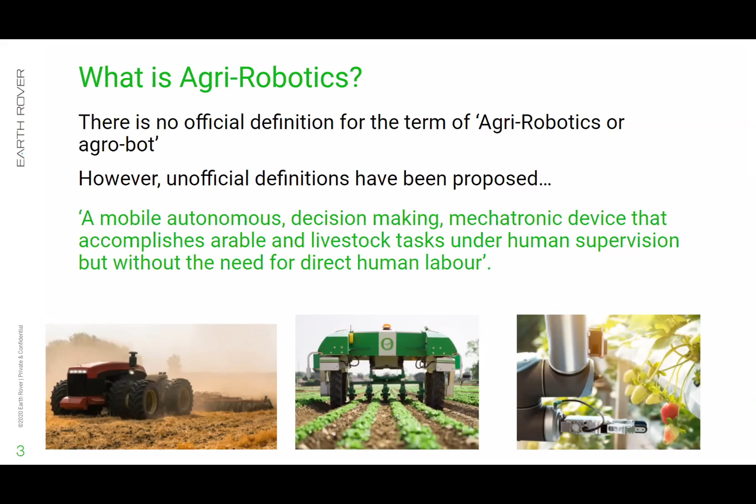So yeah, thank you for sticking around, and I'm going to pass it over to Martin, who's going to talk about the current situation in agriculture.

Waiting for the screen to come up.

In this first part of the presentation, we thought it'd be a very good idea to actually go through what the current situation is in agriculture. Only really, until you actually understand what's actually happening right now in agriculture, can you really start to look at how you can improve agriculture for the future.

So first of all, I'd like to talk about the current situation. Current world population is 7.67 billion people. This is expected to reach 9.8 billion by the year 2050. And currently, certainly in the West, we've actually reached saturation in agricultural food production, the land usage. And this is certainly starting to happen in the third world as well, in the developing world.

And you're now starting to see areas that really shouldn't be used for food production starting to be used, such as the rainforest in South America. So we're actually seeing quite a lot of stress on the land, right? More and more being turned over to farm usage.

But it's not just the world population driving the need for more food. The world is changing a lot. And in the next few slides, I'd like to actually go through the environmental, the ethical, and the economic pressures which are on land usage around the world.

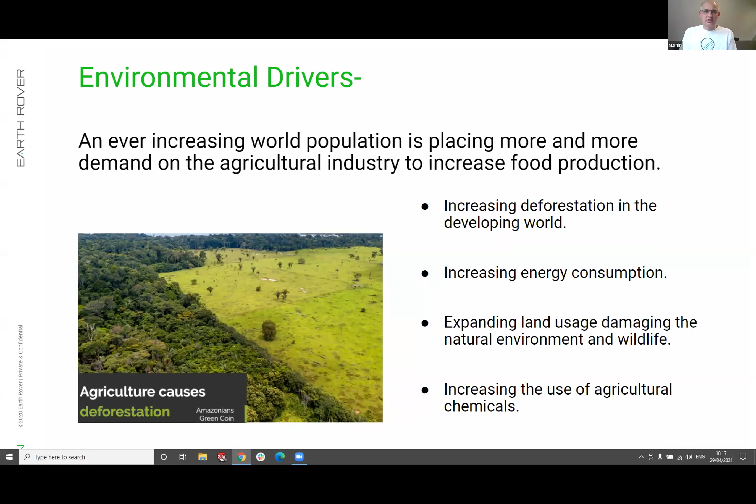So moving on to soil and agrichemicals. The current intensive farming methods degrade the soil quality and break down the soil structure. Continuous ploughing, disturbance, and continually tilling the soil to remove weeds degrades the soil quality. Certainly in the 1930s, we saw the Dust Bowl, and that was caused by poor soil management.

Controlling the levels of fertilizers with the current application methods using large spraying machines is very difficult. We can't easily control the amount of fertilizers and pesticides in the soil, and you see varying degrees of poor nitrate control in the soil.

On top of that, when spraying at large scale, it's very difficult to control the spread of these agrochemicals across the land. And bigger and bigger machinery increases soil compaction. Soil compaction means that when it rains, instead of the chemicals going into the soil, they just drain off, and you see pollution happening into the waterways from soil and agrochemicals rolling off the land.

So again, the current methods in farming do not do the soil that much good. You're seeing breakdown, and that reduces the output of farming land for a whole range of different soils.

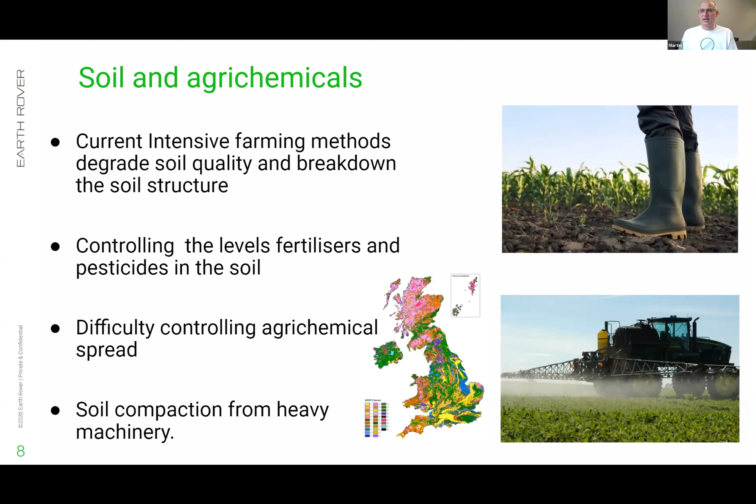So again, this is a large area of concern: water. Agriculture uses 70% of the fresh water used in the world. If you look at all the usage across industry and domestic use, 70% of that fresh water is actually used for producing food.

And this is very damaging to the planet. We use large amounts of water out of waterways, and it's very costly to the production of food. We need greater efficiency in putting water in the right places on the land.

And that's certainly an area that Sam's going to talk about in a minute, about how robotics can help with water usage.

So I'm going to pass on to Sam now, who's going to talk more about how robotics can help solve these problems. Let's stop sharing.

Okay, thank you, Martin.

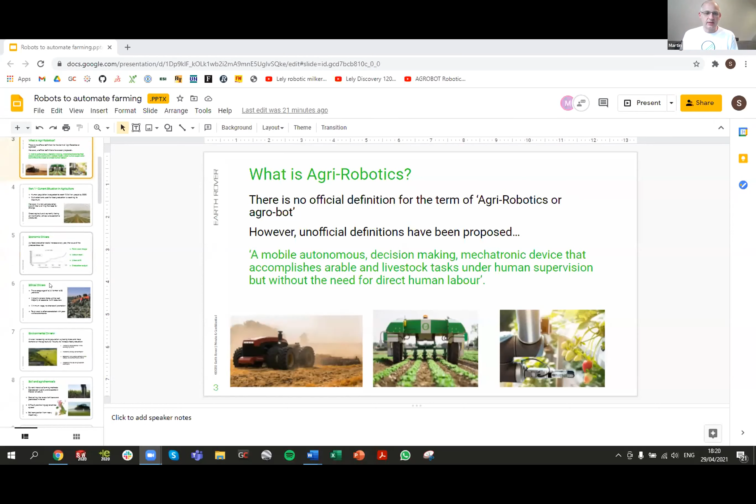So let's look at the current involvement of robotics in agriculture. The first commercially available robots in arable farming cover three main tasks: eliminating weeds, monitoring crop performance, and harvesting specialized crops. In livestock production, robots are currently used for cleaning, animal monitoring, and feeding.

These exciting developments are being made to expand the use of robots in agriculture. So in this section, we're going to go through the current uses of robots, explaining their benefits in the system, and then at the end of the presentation, I'll discuss what the future might look like for agriculture.

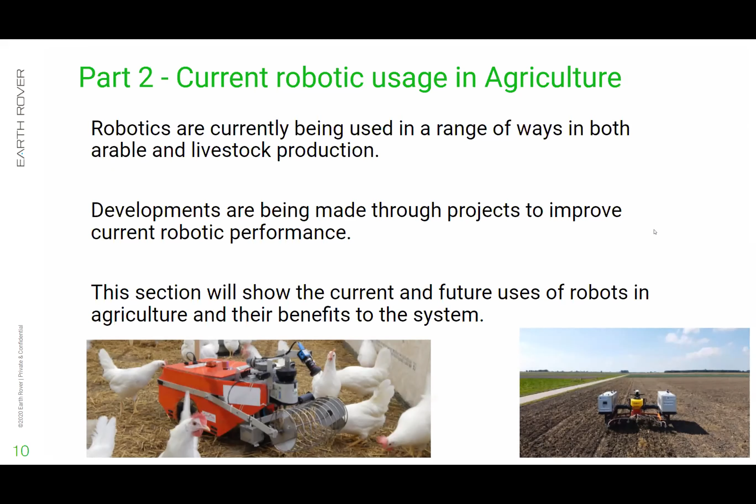So let's start with the first operation normally done in arable farming, which is soil preparation. Cultivation is currently used throughout the globe in both developed and developing countries. The principle of cultivation is to turn the soil into a fine tilth, which provides an ideal environment for seeds to germinate.

Cultivations are typically split into two groups: primary and secondary cultivations. Primary cultivations include ploughing and subsoiling. If you're unaware, subsoiling is a deep cultivation technique where the aim is to target compacted areas under the surface of the soil, typically called hard pans.

Ploughing lifts and inverts the top 8 to 12 inches of the soil, bringing fresh nutrients to the surface and burying the stubble from the previous cropping to decay into valuable organic matter. Secondary cultivations include power harrowing and rolling, which focuses on the top level of the soil profile.

Cultivations are typically slow operations and can often take several days to complete, subject to correct weather conditions. Heavy farm machinery will struggle to operate and produce a suitable environment for seed germination in wet and difficult conditions. For primary cultivations, costly high horsepower equipment is needed to pull subsoilers and plows deep through the soil.

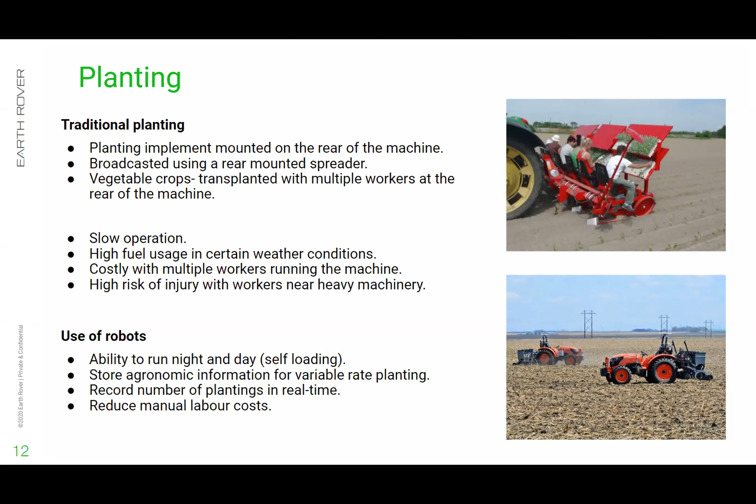Robotic planters would take up the role of 9 to 12 workers in one operation, reducing manual labour costs considerably for the farmer. This next slide shows, I visited an organic broccoli farm in the UK, and...

So moving on, we can look at crop monitoring, and the question is, how do you walk thousands of hectares of crop every week? The answer is it's not possible for humans to walk through this amount of crop and record detailed information. The issue is that you cannot manage what you cannot measure.

The current way of crop monitoring is not sufficient to maintain a high level of crop performance. Farmers need accurate plant-by-plant data for yield and early detection of weeds, pests, and diseases. Without this precise data on plant information, you risk application of costly inputs like pesticides, irrigation, and fertilizer. In addition, without detailed plant information, you may risk inefficiently using costly labour forces for tasks such as weeding and harvesting.

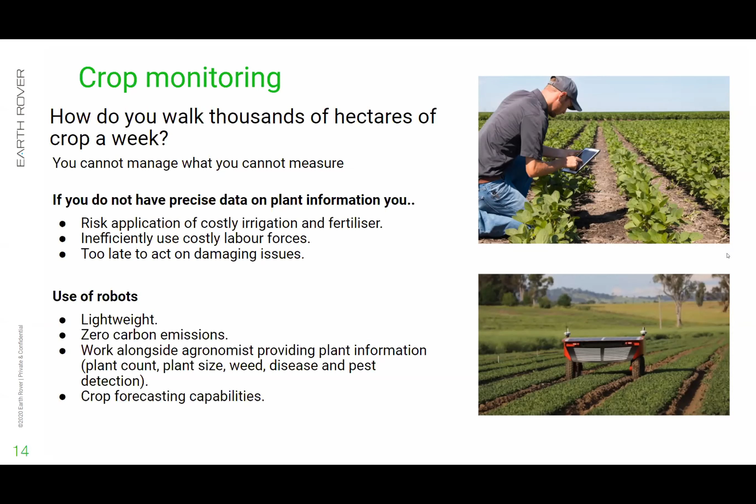One thing you might not know about Earth Rover is that we have our own autonomous scouting robot platform. The Earthrover pointer is a lightweight machine with a total mass of 75 kilograms, so we're really reducing soil compaction to a minimum, maintaining good soil structure, and reducing soil erosion. The pointer is currently being used in the UK on a large organic vegetable farm throughout the growing season, and it's also being used on our test farm in Barcelona.

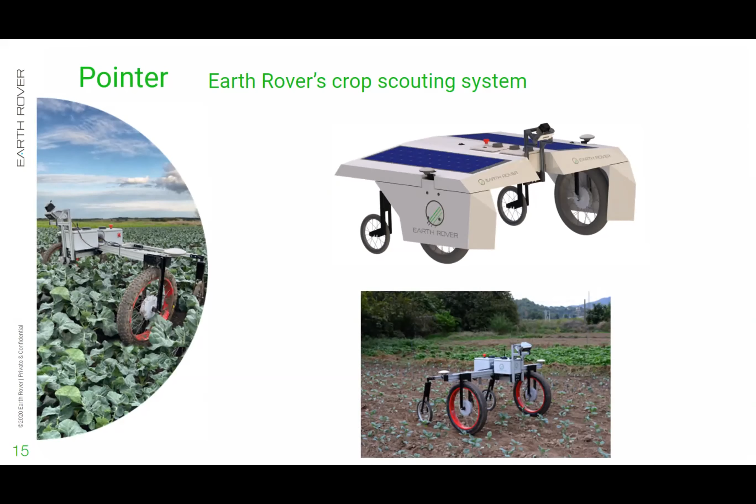The system provides the farmer with accurate data with its onboard RGB depth camera and extensive neural network for detecting, sizing, and mapping plants in real time at a rate of 2,000 plants a minute. With the aid of RTK technology, receiving correction messages through radio and NTRIP, and having our own base station, plants can be mapped to an accuracy of plus or minus 10 millimeters, and robots follow an exact path during each scouting session, minimizing soil disturbance and machinery traffic in the field.

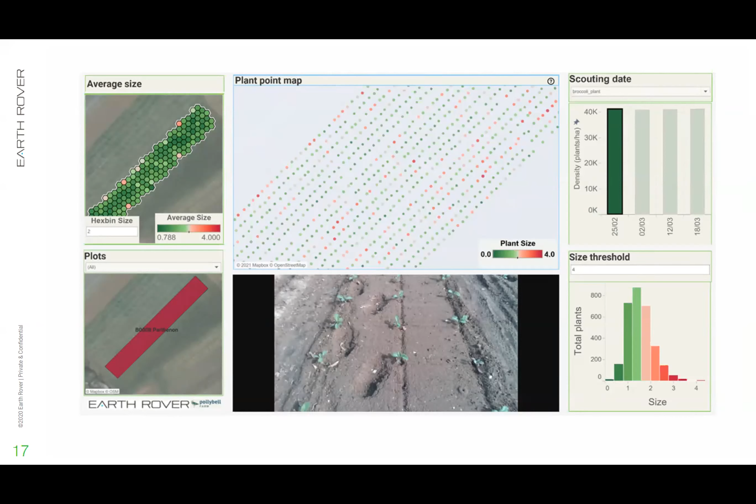As you can see at the bottom here, the ER pointer also generates and stores images at a rate of 1 image per second, and all these images are stored in our data warehouse. So if a farmer is away from the farm and notices an issue with the field from our maps, he can view these images for confirmation and make decisions remotely. Each individual plant on the map has its own ID number, so we can analyze and know each plant throughout its life. With our data, farmers can model and forecast crops like never before.

So from crop monitoring, we can move on to weeding. Weeds can be controlled in several ways, really. This can be through application of agrochemicals, mechanical weeding, flame weeding, or hand weeding, which is typically done on organic farms.

Agrochemicals are applied with expensive spraying machinery. In less developed countries, agrochemicals are still being used. However, farmers are typically not following the correct health and safety guidelines, which can pose risks to the operator. Farm workers can be exposed to harmful chemicals through inhalation, skin absorption, and ingestion, and this significant exposure can lead to long-term health effects, such as an increased risk in some cancers, birth defects, disease of the lungs, liver, and kidneys, and also some nervous system disorders.

Heavy farm machinery increases the level of field traffic and increases soil compaction, which damages soil structure for plant growth and development. Workers need to be trained on how to identify weeds, and if training is inadequate, then workers may damage these high-value crops.

Farmers, particularly in the high-value vegetable industry, spend large amounts of money on manual labour hand weeding. Typical costs for hand weeding are around £400 to £500 per hectare, and if you think about fields that contain tens, if not hundreds, of hectares of crop, these costs can really add up for the farmer. Hand weeding is also a slow process, which is seen as unappealing to many people as it's repetitive and physically demanding. Therefore, limited worker availability is a common problem, not just in the UK, but globally.

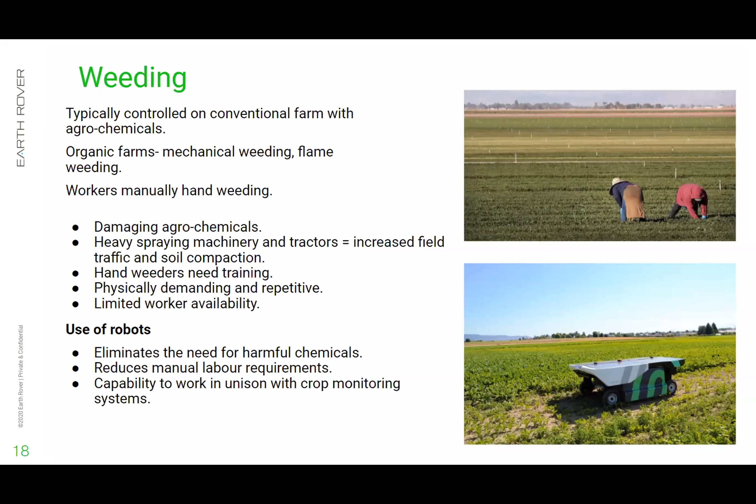They also provide the capability to work in unison with other robotic platforms. For example, crop monitoring robots could identify fields and specific locations where there are large densities of weeds that are damaging plant growth.

Earth Rover is actually focusing on this area of agriculture, and we have developed our own light weeding robot called the Earth Rover Terrier, which is currently in its development and testing stage.

Our patent pending light concentrated technology has been tested in a laboratory environment during 2020, but is now being tested on farms in Barcelona. The unit itself works at a wavelength that's optimized for plant leaf absorption, using a dedicated camera system and an embedded computer to detect weeds using its AI and control system.

The Terrier robot is fully battery powered, and therefore it is a carbon emission-free solution without disturbing the soil, retaining soil carbon content and keeping good soil structure.

The Terrier works on a start-stop system, meaning the robot will continue autonomously down the field until weeds are detected, where the machine will stop and deal with the weeds.

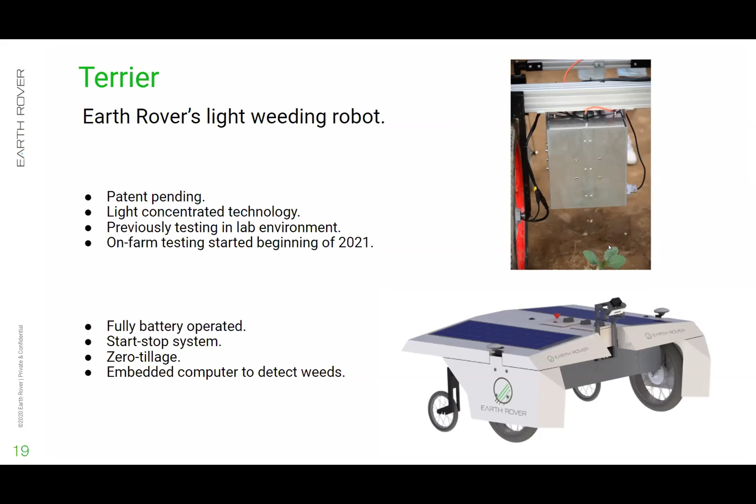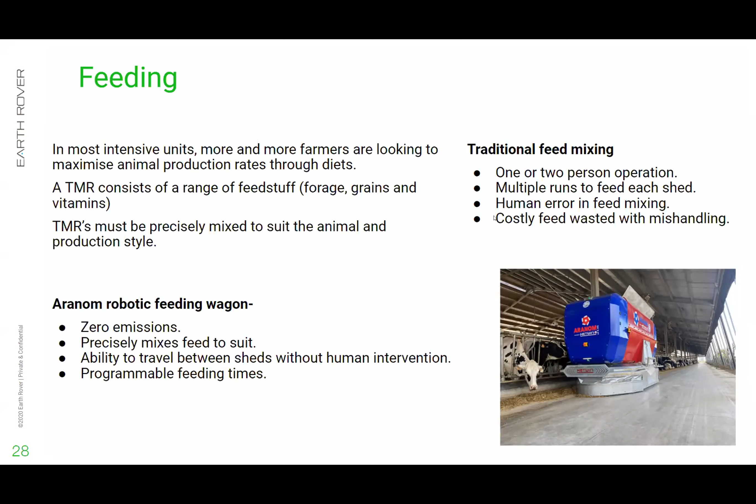So let's move on to another stage, such as milking. There are predominantly two types of milking systems used in the dairy industry: the herringbone and rotary milking parlours. The number of rotary milking parlours has actually increased in countries such as New Zealand and the UK. This type of system is typically dependent on the size of the herd.

For herd sizes normally above 500, farmers normally opt for the rotary system. Traditional herringbone systems can be slow - for example, the loading and unloading of cattle takes time, and slower milking cows can hold up entire rows. Depending on the size of the parlour, milkers are constantly walking back and forth down the aisle managing each cow. For this system to work well, an efficient milking routine really needs to be put in place.

So robotic milking is becoming increasingly popular in livestock production. It's expected that by 2025, 50% of all EU herds will be milked robotically. One commercially available robotic milker is the Lely Astronaut.

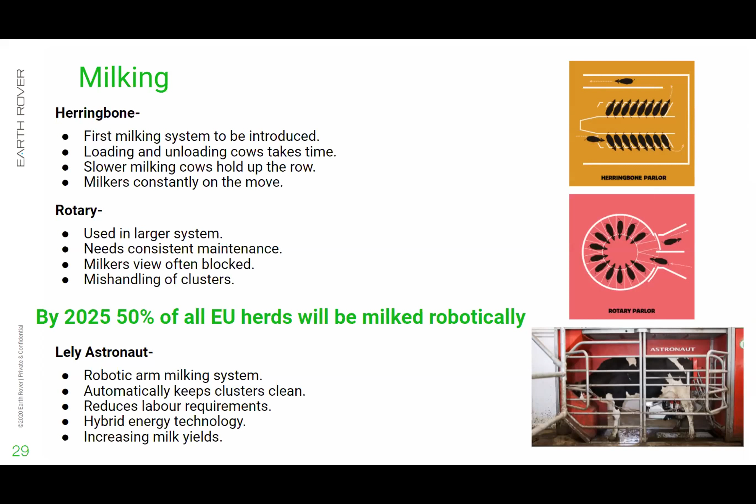Having a well-maintained environment reduces animal stress, improves animal health, and subsequently improves animal performance. In poultry sheds, diseases can have a serious effect on production. Due to indoor systems containing thousands of birds in a single shed, disease can spread very rapidly. It's still a frustrating fact that mastitis, reduced fertility, and foot health issues still count as the three main reasons for culling on dairy farms.

Current practices for cleaning livestock sheds are often slow and arduous, as animals often need to be moved into holding pens before the area can be cleaned. The current use of tractors and loaders means that in some tighter areas in the sheds, spots cannot be cleaned as they're out of reach. These are either cleaned manually, which is slow, or often left behind, which could be a catalyst for disease spread. The scraping of slurry in indoor cattle sheds is usually done into a slurry pit or lagoon, which is a considerably dangerous task.

Slurry pits and lagoons are, unfortunately, the main causes of human death in livestock units. Pits and lagoons act almost like a fizzy drinks bottle, because as soon as they're agitated, gases are released. These gases found in pits and lagoons contain methane, carbon monoxide, ammonia, and hydrogen sulfide. High levels of hydrogen sulfide are particularly dangerous as it cannot be detected by the human nose, and fatal exposure can happen very quickly and without warning.

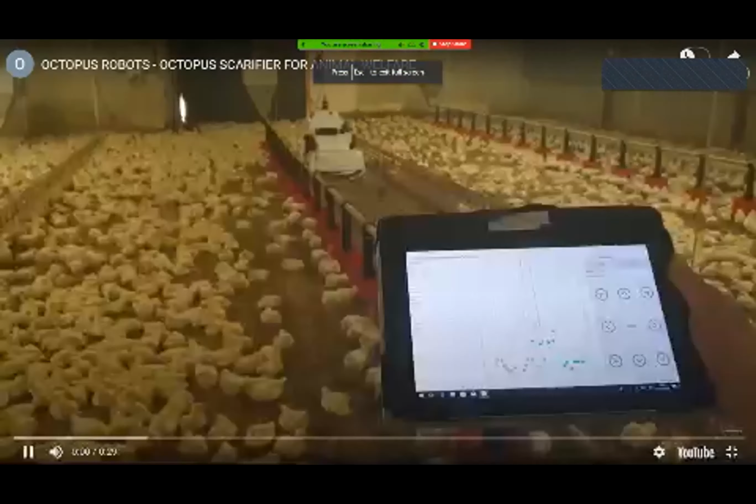So as you can see here, on the tablet is the visualization that the farmer could see, and the robot autonomously going up and down the shed, aerating the bedding, preventing fermentation of the bedding and reducing ammonia.

Moving on from livestock, we can have a look at pack houses, which contain both veg and the meat industry. In order to meet these growing demands, pack houses now need to think about optimizing their efficiency.

Factories in both the meat and vegetable industries are struggling to find skilled workers with the necessary qualifications to fill jobs such as meat cutting, packaging, and food and meat grading. Some may see that increasing the number of workers in the factory will improve efficiency, but this may have a negative effect and subsequently increase the risk of injuries in the workplace. In both meat and vegetable pack houses, factories use sharp-edged and heavy equipment, which can cause serious injury or death if used in the wrong environment or in the hands of someone not professionally trained.

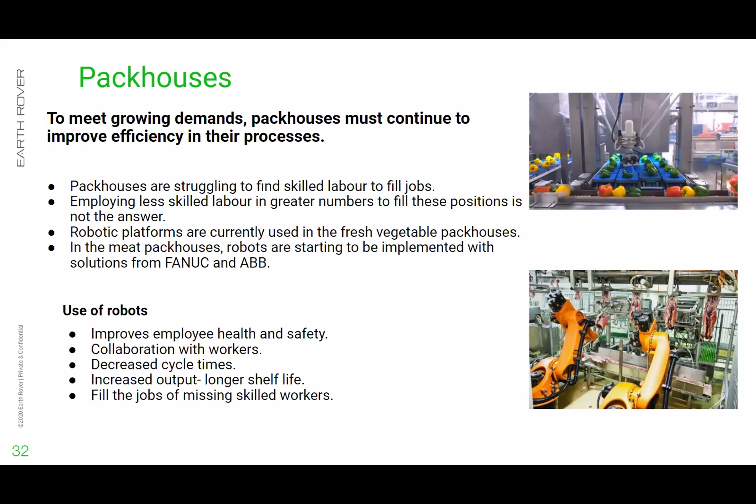Collaborative robots that work with humans help increase productivity, improve health and safety, and attract skilled workers and graduates to the food processing industry. So that's a bit about livestock production and the use of robotics in pack houses. Now I really want to talk about what the future really looks like in farming in terms of robotic use.

I think it should be stressed that we do not see these changes and implementations of machines happening overnight on all farms. Some of these systems detailed in this presentation are out of budget for farmers. However, as this technology matures, its price will decrease, and the availability of manufactured robots with smart, cheaper components will provide a cost-effective option for these smaller businesses in less developed countries in the future.

I see a future of robust and reliable systems that will be interconnected and work alongside humans in the field or in factories. I see a future where arable robots can have interchangeable tools, allowing them to perform multiple tasks, such as tillage, weeding, crop inspection, or planting, which will support production systems to meet the increasingly high demands by improving efficiency and production throughput.

I see a future of a fleet of robots which can use multiple data sources and share data between platforms to work in collaboration on a single task. This means that higher priority jobs can be dealt with in unison. A future where agricultural robots can learn and develop new skill sets and understand human processes through machine learning and AI to improve their own efficiency.